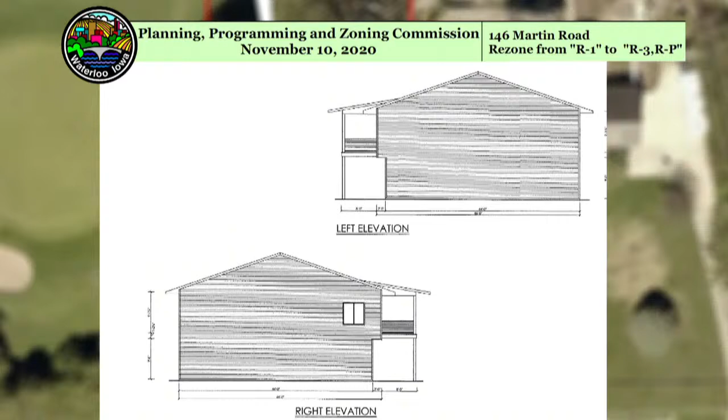The floor plan on the upper level of the south end of the building shows a living room and one bedroom that points to the south, and potentially there could be some windows added in those areas, but the developer can probably speak to that about adding windows.

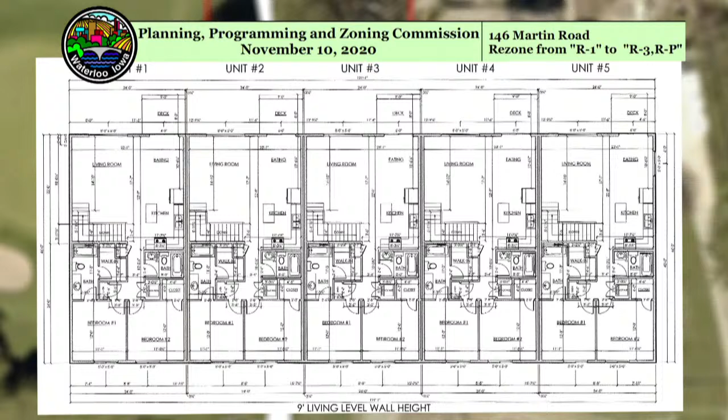Right now there is a duplex on the property that was built in 1957 and it has been vacant for a few years now, and redevelopment of the site would appear to have a positive impact on the area.

We did receive one letter of opposition, noting concerns of setting a precedent for similar development in the area, not fitting in with the characteristics of the neighborhood, and increased traffic and traffic safety.

Leisure Services has endorsed the project, and a condition of approval is getting an indemnity agreement signed between the commission and the applicant. Staff is recommending that the request to rezone the 0.36 acres from R1 to R3 RP located at 146 Martin Road be approved for the following reasons.

Rezoning would not appear to have a negative impact on the surrounding area, and the proposed residential zoning district would be consistent with residential development in the area. The request would not appear to negatively impact pedestrian or traffic conditions. The new development would remove a duplex that has not been used for several years, which would appear to have a positive impact. The area is served by all necessary utilities and is a good infill development project, with the condition that the final site plan meets all city codes, including but not limited to parking, landscaping, drainage, etc. That's the staff report.

Any initial questions for staff? Okay. Then we'll go to the applicant.

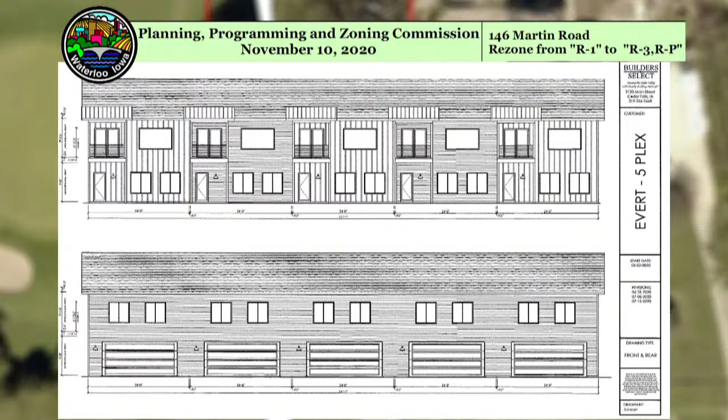Based on my own experience, I thought you had to have a walk-in door too. Is the building department okay with that? Yeah, we haven't heard anything to the contrary, Craig. The access door at the main level, there needs to be more than one, and there will be one on the golf course side.

Right, okay. I have another question for you. Are you going to sell these individually or rent them out?

Yeah, so that's part of the overall favorable nature of this, not just to the city but to the neighbors. These are going to be individually owned places. I bought this property 20 years ago so that I could make sure that my neighbors right there were folks that would help take care of the place. And to the degree these will be individually owned, they'll have some pride in ownership.

There'll be an association. It's not going to be a transient group of folks. It's going to be people with some real skin in the game to be able to buy one of these. Okay, thank you.

Yeah, I appreciate the question. Thank you. I do have one other question, maybe I just didn't say it clearly. I know the 2-car garage parking for each unit is there, but I didn't see anything about guest parking.

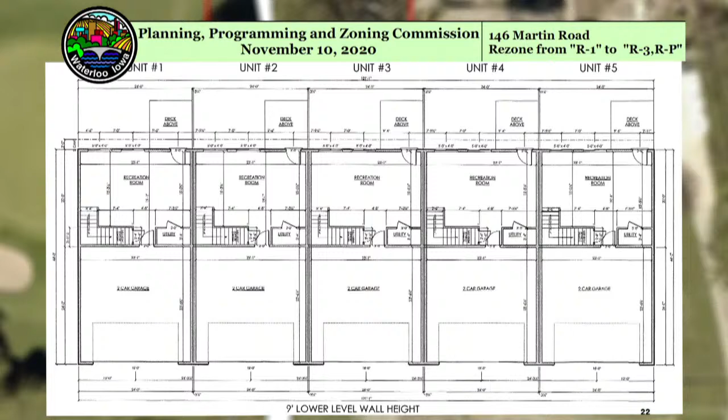And I know that there's no parking on the street. Right, actually the parking on the street is the 100 block. So as you get just past about halfway through the property line, there is street parking available.

So when they reference the 100 block, that just makes sure that coming up over that hill, if you're coming from east to west on Martin Road from 4th to Ansborough, there aren't cars forcing someone coming over that hill too quickly to have trouble seeing them. But as you get down to the bottom of the hill, which I think is halfway or so through the property line, there is street parking.

Our hope is that there'll be some availability by having the driveway wide enough that if people needed to park either behind the garage doors or to the east of there, they would be able to. Okay, alright, thanks.

Any other initial questions for Mr. Bullerman or Mr. Hewand?

Can non-council members ask questions now? Yes, one second here. So, Eric, do you want to see if there's anybody in the chambers first who wants to speak on this matter?

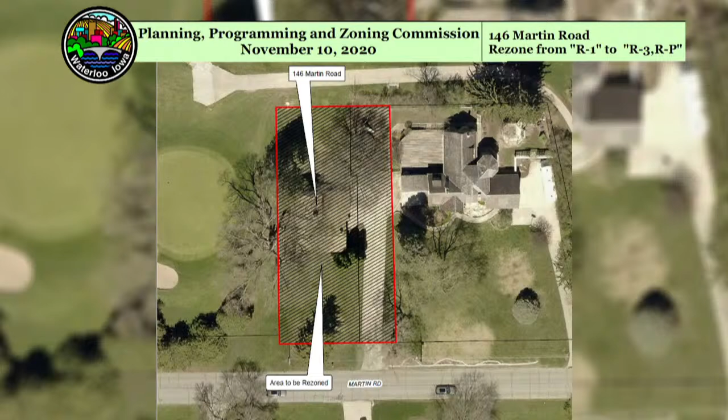Great. If there aren't any other questions right now, do we have a motion to close the public hearing? This is Leistikow, so moved. Do I have a second? Holdeman, second. All those in favor? Aye. Any opposed? Okay, the public hearing is closed.

Are there any additional questions for staff or any other additional discussion? This is Leistikow. I'd just like to point out that this plan has also been worked out with the Leisure Services Commission here. I didn't see any other discussion currently on this item, but I'm reading the notes on it, so I appreciate the work we've done to make sure this isn't impacting any city resources.

All right, is there a commissioner that wants to make a motion? Motion by Schoberg. You want to read what your motion is, or say what your motion is?

To approve the development at 146 Martin Road based on staff approval, with the notes that the rezoning request would not appear to have a negative impact on the surrounding area, and the proposed residential zoning district would be consistent with residential development in the area. The request would also not appear to have a negative impact upon pedestrian or traffic conditions within the surrounding area. The new development would remove a duplex that is in poor condition and have a positive impact on the area. The area is served by all necessary utilities, and this is a good infill project.

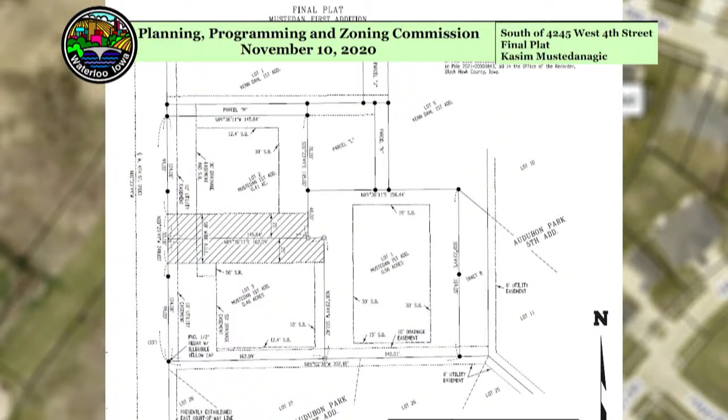A motion that we approve the request by Kasim Mustedanagic for the final plat of the Mustedan First Addition, a replat of a portion of Kenn Dahl final plat, a 3-lot residential subdivision located south of 4245 West 4th Street, be approved for the following reasons: the request would not appear to have a negative impact on the surrounding area; the plat would provide for new residential development compatible with already existing development in the nearby vicinity; the request would not appear to have a negative impact upon pedestrian and traffic conditions within the surrounding area; and the request is in accordance with the subdivision ordinance and in conformance with the future land use map and comprehensive plan for this area, which designates this area as low-density residential.

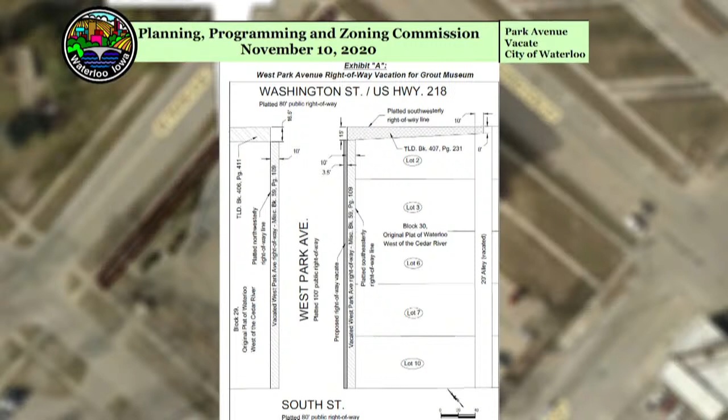Therefore, staff recommends that the request by the City of Waterloo to vacate a platted 3.5 by 300, 1,050 square foot section of city right-of-way along Park Avenue between Washington Street and South Street, located north of 505 South Street, be approved for the following reasons: the request would not appear to have a negative impact on the surrounding area, the request would not appear to have a negative impact upon pedestrian and traffic conditions in the surrounding area, and the vacate will fix an incorrect legal description. And that's the staff report.

Thank you. Any questions for staff? All right, Eric, is there anyone there to speak on this? There is not. Is there anyone else left in the chambers? There's one more individual, but I believe he might be for the final agenda item. Okay, thank you. Is there anyone on the call that wants to speak on this agenda item? Okay, any other additional questions or discussion from commission? Okay, do we have a motion?

Motion by Schoberg to approve the request of City of Waterloo to vacate a platted 3.5 foot by 300 foot section of the city right-of-way along Park Avenue between Washington Street and South Street, located north of 505 South Street, be approved as the request would not appear to have a negative impact on the surrounding area, the request would not appear to have a negative impact upon pedestrian and traffic conditions within the surrounding area, and this request would fix an incorrect legal description.

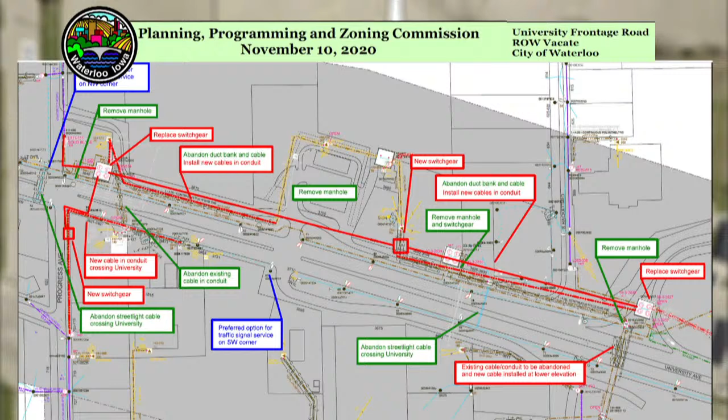The University Avenue corridor is a commercial corridor in this portion, but has seen some vacancies along the corridor in recent years. City staff is working to create a better traffic flow, more pedestrian accommodations and options along the corridor, as well as improvements to business expansion and redevelopment in the area.

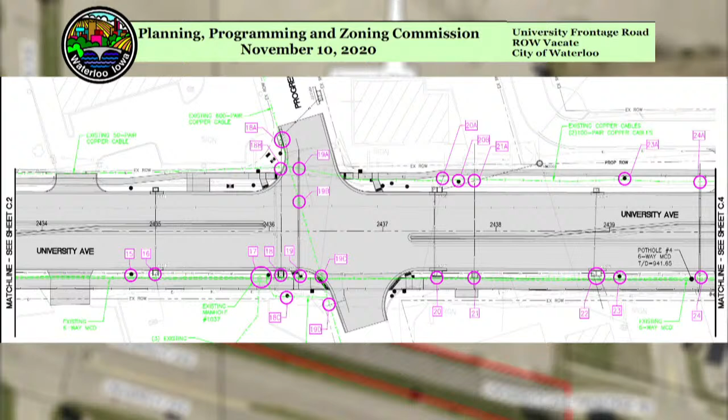The request to vacate the University Avenue frontage road area would appear to help redevelopment of the site, eliminate unneeded access right-of-way for the city of Waterloo, and return it to the tax rolls, and help create outlots for development closer to the roadway.

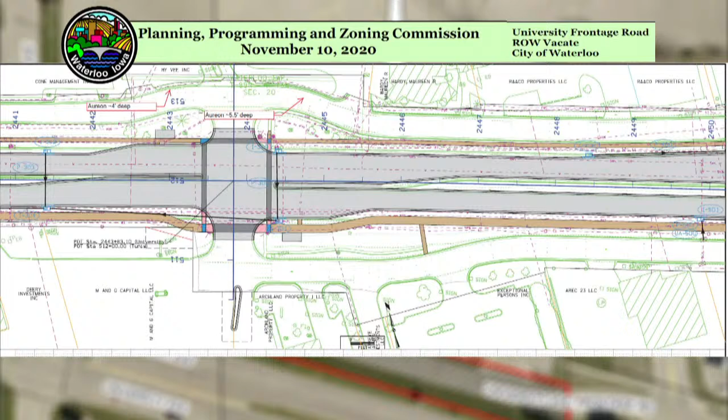The redevelopment of the Kmart site will be a big project for the future of this corridor, and most likely involve the reuse or demolition of the former Kmart building, with outlot development in front of the former building. The former Hy-Vee site sits to the west of the area, has no frontage road, and could have a similar reuse or demolition feature with outlot development.

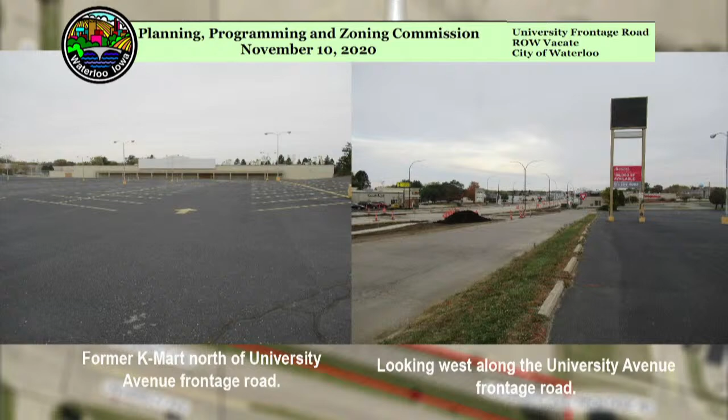The addition of the right-of-way at this location, the 5-lane concept west of Progress, and other improvements to the traffic layouts, turning movements, and aesthetic designs are being constructed for improvements of the general area.

Therefore, staff recommends the request to vacate 34,415 square feet, 0.8 acres, of University Avenue frontage road be approved for the following reasons.

The request to vacate would appear to have positive impacts on and options for redevelopment of the former Kmart site. The requested area is owned on both sides by the same ownership and thus does not appear to be needed for public right-of-way, pedestrian, vehicular, or any other traffic purposes.

The request to vacate would help redevelopment of the abutting sites, creating additional land for potential outlot development, closer setbacks for building locations, or additional area for parking, subject to the following conditions: that any easements needed for utility purposes be retained over, under, and upon the area to be vacated. Such easements will be included on a plat of survey for the vacate request.

Are there questions for John?

Anyone on the call here to speak on this agenda item? And just to make sure, Eric, anyone there that wants to speak on this agenda item? Nope.

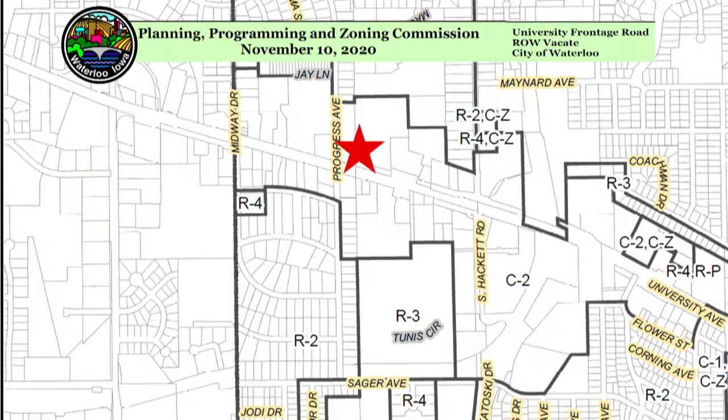The requested area is owned on both sides by the same ownership and thus does not appear to be needed for public right-of-way, pedestrian, vehicular, or any other traffic purposes.

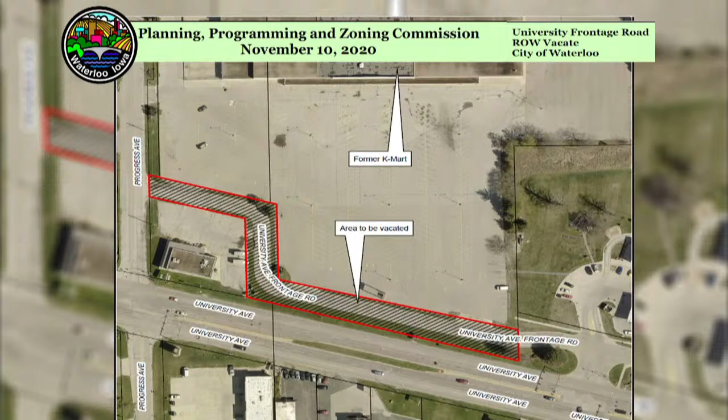The request to vacate would help the redevelopment of abutting sites by creating additional land for potential outlot development, closer setbacks for building locations, or additional area for parking, subject to the following condition: that any easement needed for public purposes be retained under and upon the area to be vacated, said easements to be included on the plat of survey for the vacate request.

All those in favor? Aye. Any opposed? Okay, motion carried.

Thank you. Next, we will have a request by James Hurst for an encroachment agreement for construction of a powered automatic gate that will encroach 1 foot into the right-of-way of Fletcher Avenue located at 2425 West 4th Street in the R-2 One and Two Family Residence District.

We have the staff report first, please. This is Heiberger with the staff report. The applicant is requesting approval of an encroachment agreement to allow for an electric chain link fence gate to be constructed approximately 1 foot into Fletcher Avenue city right-of-way.

The request could have a negative impact on the surrounding areas. Approval of an encroachment agreement could set precedent for other properties in the area to request similar encroachments on the city right-of-way. However, the encroachment is very minor at 1 foot and only overhangs the right-of-way with no portion of the encroachment being attached or connected to the ground within the right-of-way.

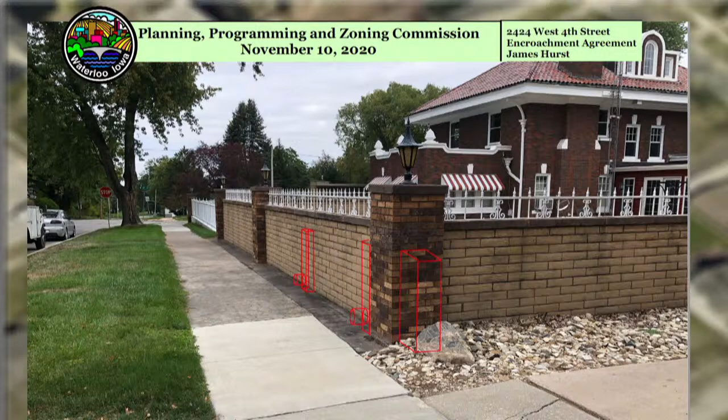The request does not appear to have a negative impact upon pedestrian or traffic conditions in the area. There are sidewalks along West 4th Street and Fletcher Avenue, and the encroachment will not impede any sidewalks.

The lot in question is zoned R1, 1 and 2 family residence district, and has been zoned as such since 1969. To the north, south, east, and west is R1 residential development, the 1 and 2 family district.

No portion of the lot in question is located within a special flood hazard area, according to FEMA. The nearest utilities are a 10-inch sewer line and 4-inch drain tile underneath 4th Street. There are no utilities located within the encroachment area, and no utilities will be impacted by this project.

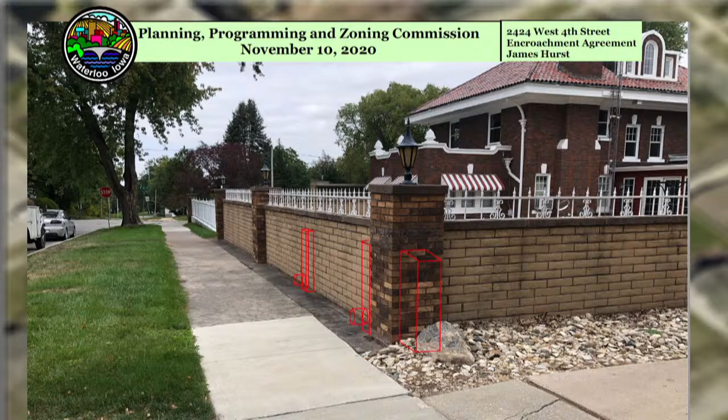In the past, encroachment agreements entered into have included provisions that allow the city to give notice of termination of the agreement if the right-of-way or utility easement is needed for any future public purposes, and require that the city have no liability for any damage that may occur.

The applicant is requesting an encroachment agreement to allow an electric chain link fence to be constructed 1 foot onto the city-owned right-of-way. The gate will not extend past the sidewalk. The majority of the gate will remain on the applicant's property, but the rollers that allow the gate to open and close would overhang the street right-of-way by a minimal 1 foot.

There's no platting as part of this request; therefore staff recommends that the encroachment agreement request by James Hurst to allow an electric chain link fence gate to be constructed 1 foot into the city-owned right-of-way at 2425 West 4th Street be approved for the following reasons: the gate will not extend past the sidewalk or southern property line, and there were no complaints from neighboring property owners concerning this project.

And that's the staff report.

Eric, is Mr. Hurst there in the chambers? Yes, he is. Do you have anything else you'd like to add? He doesn't have anything he needs to add, so he's available if there's any questions. I was just told to be here in case there were questions.

This is just a slight question. What's the deal with it being an electric fence?

This is Schrader with staff. I was thinking that probably isn't the best word to use, since it might lead some to believe it's being electrified. That's not the case. It is powered, meaning electricity will come to the gate to power a motor that will run the gate, opening and shutting it by motor rather than some sort of manual operation. So that's what 'electric' meant. It's a motorized, powered gate.

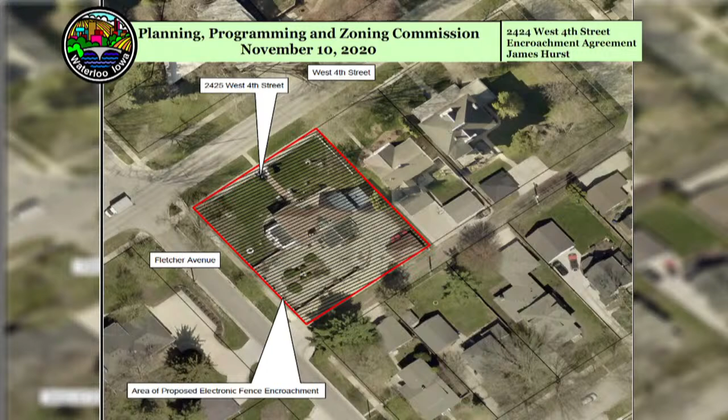Does someone want to make a motion? Motion by Schoberg to recommend the request by James Hurst to allow an electric chain link fence to be constructed 1 foot into city-owned right-of-way at 2425 West 4th Street be approved, due to the gate not extending past the sidewalk or southern property line, and there being no complaints from neighboring property owners concerning the project. Second by Dudot.

Okay, all those in favor? Aye. Any opposed? Okay, motion carried.

Okay, let's check in here. Thank you. Wherever.